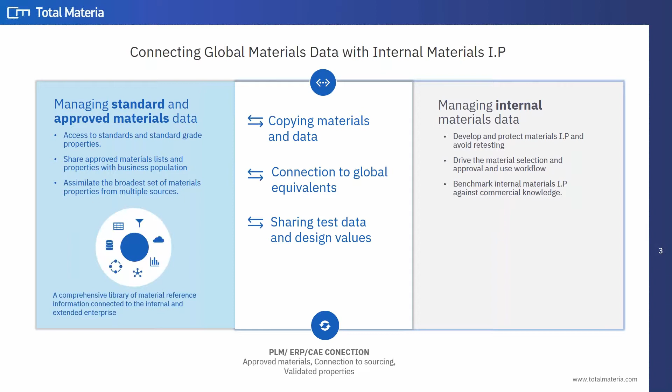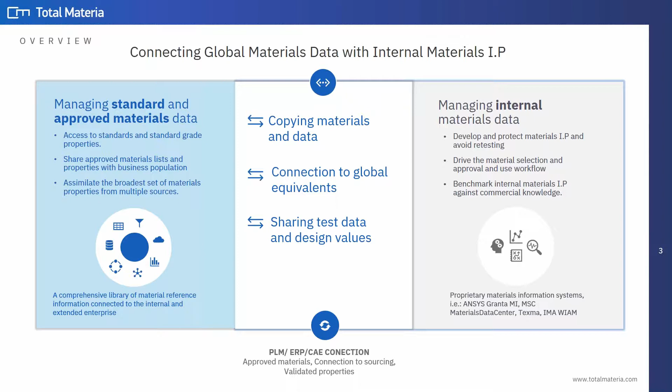So we're talking about a library of materials reference information that can be connected to internal materials data systems, and you'll know some of these names at the bottom here. We have Total Materia providing a data management tool integrator, and you'll also probably know something about Granta, MSC, Texma - this is what we're talking about when we think about materials management systems.

So again, theoretical point, let's take a step back. Why is standard grade material important? Well, the fact is that inside the business, although we may be approving those materials and calling them something else with an internal designation system, they are still connected to standard grade materials - materials from ASTM, from IS in India, GB in China, EN in Europe, DIN in Germany. The scope of standardized grade materials is critically important as a bedrock or foundation for the development of internal approved material lists.

So whether it's about finished products or manufacturing processes, the reference in most industry sectors is connected to the world of standardized materials. And that's really tough to comprehend, especially when we start thinking about global business.

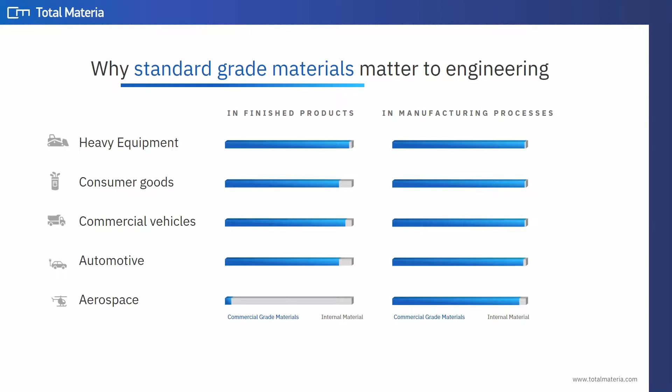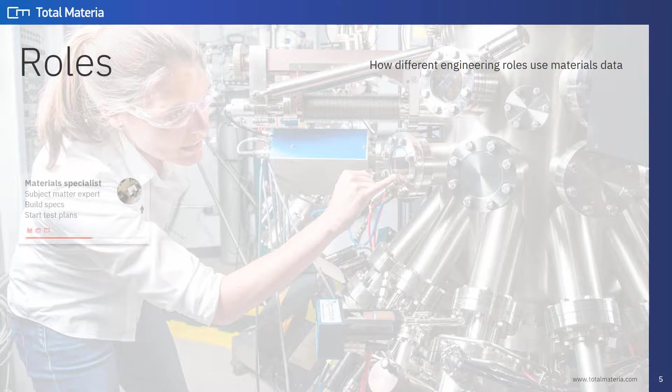Second thing is to think not only about what type of materials and what type of materials information is important, but also what roles use data for, and what's important to those specific roles in the business. There isn't just one group. It's not just simulation, I'm sorry to say.

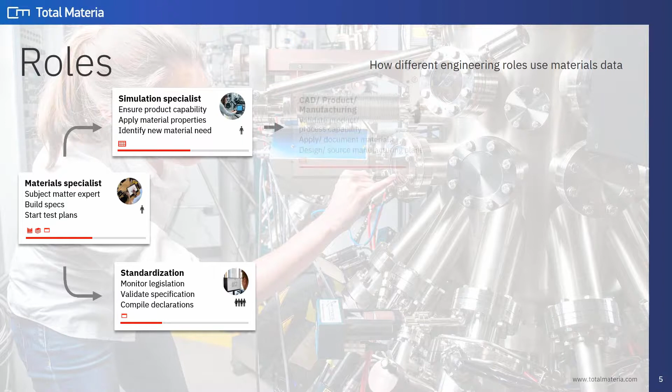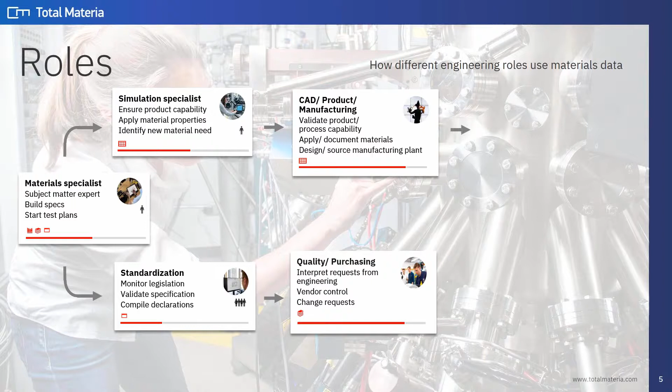I think probably a lot of you are from simulation or CAE. Dare I say, it's not just about you. We also have many other groups in the business which can utilize well-structured data for their jobs, for the roles and tasks they're doing, which means a practical platform for materials information can be used by practically all areas of the business that need data to do their jobs.

Whether it's about the materials specialist who has pretty much big responsibility for controlling specs, starting test plans for new material validation - yes, we have other groups which are monitoring legislation and standardization. Some profiles would be known as product stewards, for example, material stewards, who have a deep understanding of the standardization of information coming into the business.

We also have, of course, what we would consider more focused data users who, for example in the case of simulation and CAD, are looking for very specific materials properties for the most part to carry out their business function. So finding advanced properties, stress strain curves, fatigue data in order to run accurate calculations is a simulation specialist's focus. Now, there are many other things that could be interesting.

For example, how do we compare material behavior? How do we make a material selection, uncover opportunities to find other possible materials that can do the job in a better, safer, stronger, lighter way. But at the end of the day, the requirements in that area are quite specific, and we'll talk about that as we go through.

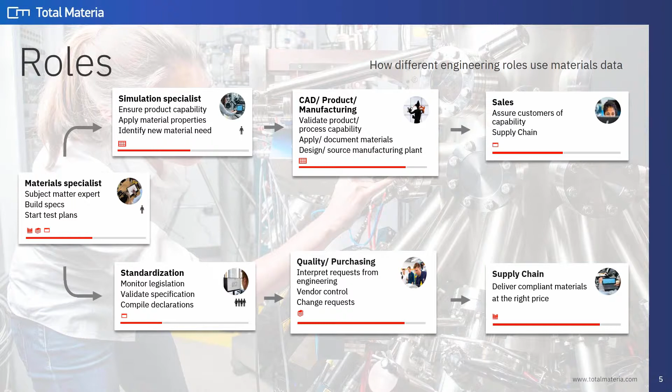The main takeaway from this slide is that different groups in the business have different roles, different jobs, different objectives. But using a comprehensive, joined up set of information to make those decisions means that we still have consistency. We have a single source of information for a business, and with a practical approach, it can be accessible by all of these characters in order to drive the main focus of the business, to have good sales and to have a quality supply chain coming through from the other end. So it's very important that we consider this.

So let's run through a couple of points about what's important for reliable data when we think about external materials databases. I'm talking about Total Materia style or type of reference databases which provide information for the business that is not inside the intellectual property that you hold in the business. The other question is whether that materials information you have is organized in such a way that is exploitable, discoverable by different groups in the business.

So external databases like Total Materia, where people come, need to be complete, because more options means more opportunities in material selection. If you don't have the full picture, how can you make informed decisions about materials?

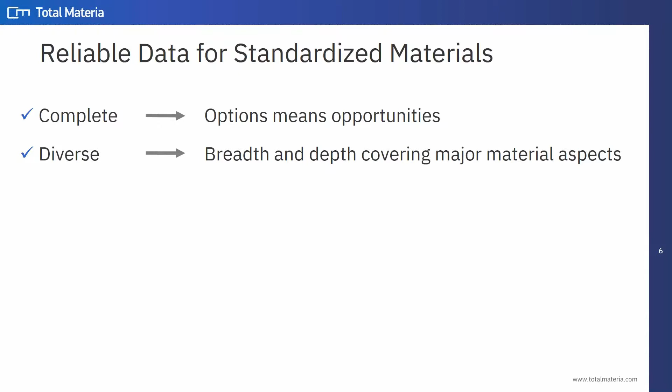The diversity of the data - I already talked about different profiles. If you take a material expert, he's not just thinking about basic durability properties of a material. He's thinking about the application of the material. What happens if we put this into a corrosive environment? What happens if this finished product is left out in the sunlight? What if it's in a situation or application which requires welding? What does that do to the integrity of the product? So diversity in the data is critically important.

Reliability, accuracy, trustworthy for repeatable results. That means that if you have a reliable resource of data, you're able to ensure that decisions made upon that data are accurate, but also to ensure that different groups or levels of experience and knowledge in your business are leveled in a way where decisions about materials and information coming from materials can be made consistent. That means there is a best practice for everybody to go to one place and find the same data and make the same decisions.

Curated. What does curated mean? It means looked after, kept up to date. It means basically how do you have a resource of information which can be put into place, looked after, and that means the continuous prospect of obsolescence, which often comes with sources of information like external databases of data, is avoided. But that takes a huge amount of work.

I'll talk about that when I talk a little bit about the context of Total Materia.

Comparable. That's a simple word, but actually there's a lot of detail and a big importance for the knock-on effect of future applications. A relational structure of material information is critical in the optimization of selection possibilities, because if it's not done in an organized and relational way, how can you compare apples with apples? It needs to be done in a way which is organized and delivered to end users where they can easily compare not just similar materials, but also materials from different groups. How do I compare a stainless steel against an aluminium against a composite material in a lightweighting study? This is really important, and it has to be accessible.

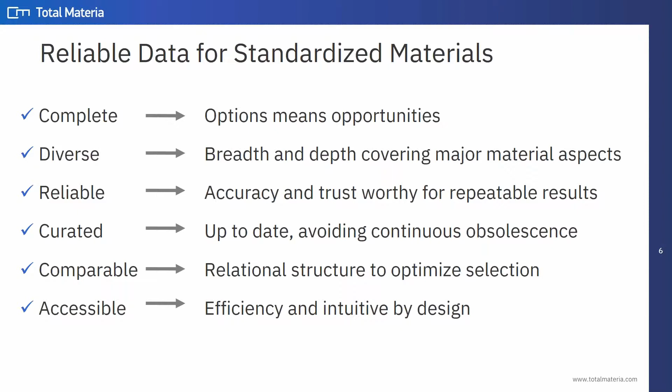So if we're talking about global business, it's not just about efficiency and user experience, but it's also about localization. It's also about being able to make this available to different people in the business.

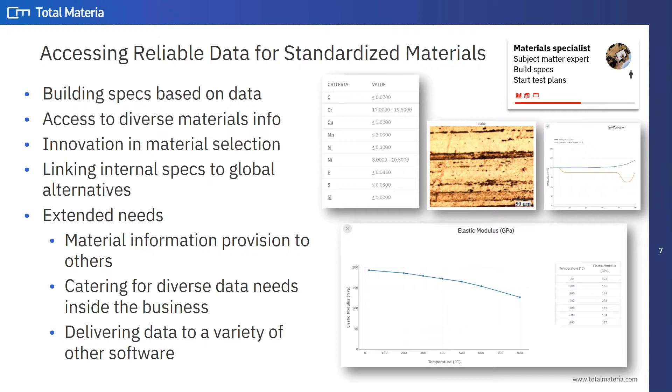So I'm going to be a little bit quicker, but when I talk about material specialists, just to dive in, building specs based on data - I talked about how a material specialist needs to have diversity in the data. That means extended needs of the information, whether it's basic chemical composition, microstructure, different corrosion diagrams, or just basic physical properties. The extended needs need to go through to the business. We see material specialists as providing to internal customers like simulation in a specific way.

Simulation specialists have another specific requirement for data. You have different periods or stages of your analysis work, starting with the initiation phase where you're defining the task and executing the model and calculation.

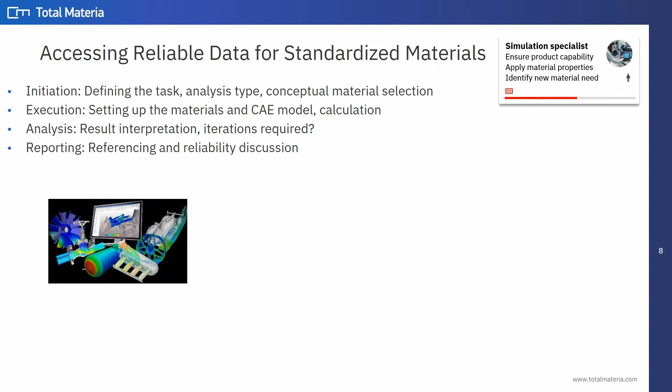This is where the feeling of not having data starts to appear. You become aware that you need accurate data to do your analysis. You do the analysis, interpret the results, and decide whether you need to repeat or iterate the calculation.

And finally, reporting, which means having to justify the reliability of the discussion. So overall, we're looking for a very decent error margin in our simulation. But how does that relate to the world of materials properties? Well, it's all over the place.

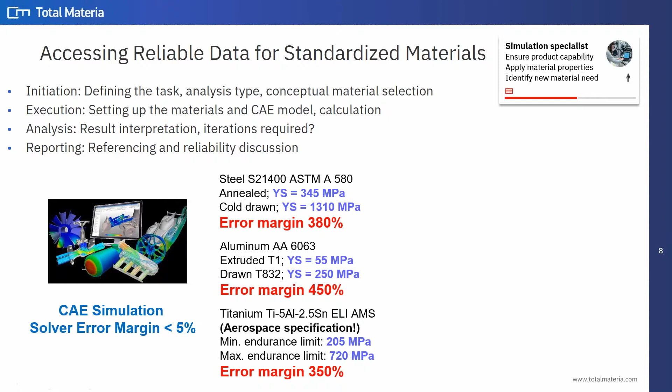Let me be clear with a simple use case. If we take a stainless steel and look at two different delivery conditions, you can see a huge difference in the yield stress data. An annealed material delivers a yield stress of 345 megapascals, while a cold drawn one delivers over 1300 megapascals. That's massive. So if we make the wrong decision in selecting that data, what's that going to do to our simulation error margin?

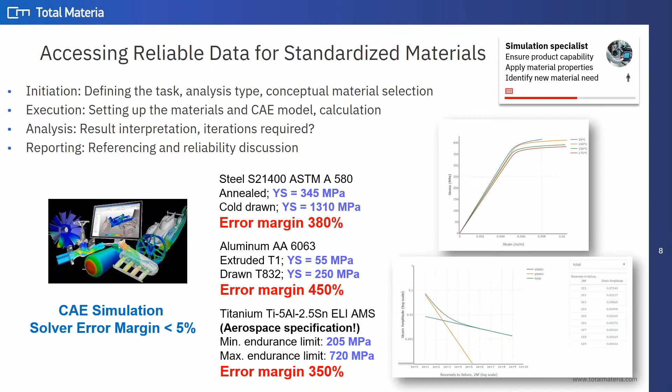We need to take care. That's why accurate delivery of materials information from standardized sources is critically important.

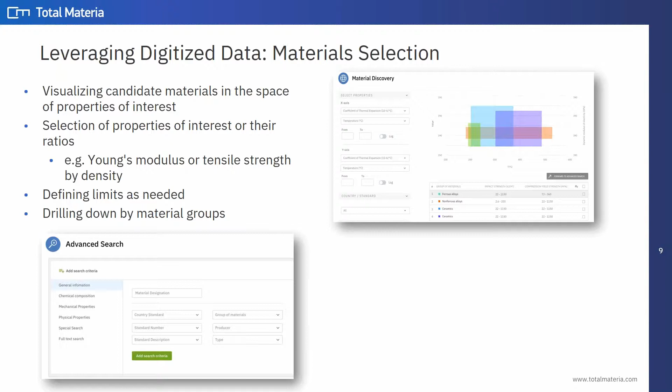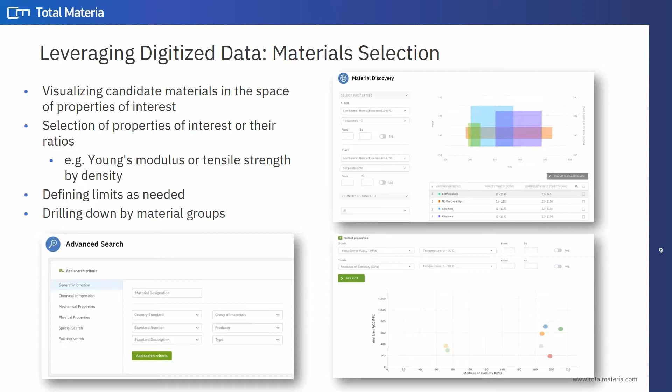It's also about selection. How do we make decisions conceptually about groups of materials? How do we visually make quality decisions based on properties of interest, maybe ratios of properties? For example, for light weighting, we can put strength parameters and ratio them with density, defining limits of durability to understand minimum levels of strength, so we can make quality decisions and compare materials graphically at the material level or the property level.

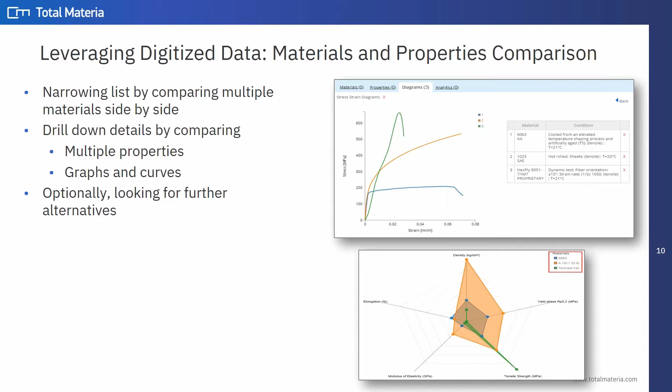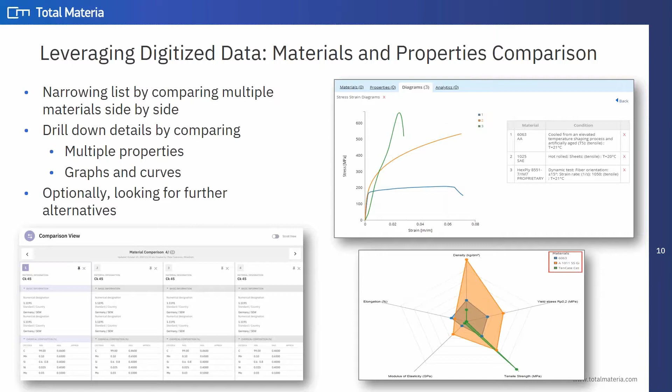So this idea of materials comparison and selection has to be done in the context of a sound relational database, structured to allow that kind of data visualization and comparison.

I have to drop in about how we tackle this problem because it's important. We've been doing what we do for 20 years now, and the Total Materia database offers that comprehensive go-to place for materials information, whether metallic or non-metallic materials. For the design simulation group, we have a huge reference and library of experimental data.

Coming from around 3,000 experimental sources. So we're sourcing that information, which means that your typical way to find data—hunting for the experiment, going to Google, assuming anything is better than nothing—we can help there.

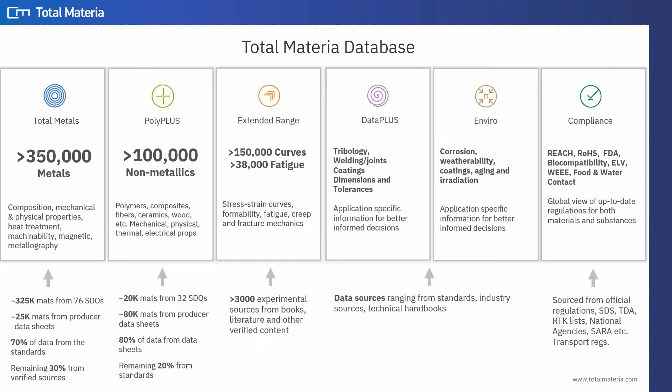And this is really important for today's takeaways. DataPLUS, Enviro—I talked about material specialists having access to a wider scope of information, even covering the global compliance and regulations landscape, which is becoming critically important for materials and substances used in the business. So this all comes together through this comprehensive delivery of materials information.

So that's about external resources, standardized data, and a comprehensive library of information to help make sound decisions based on a huge wealth of information out there.

It's to help you avoid the regular and common ways you currently find information—standards, some books, maybe access to specific websites, some of your own information, but more often than not, Google. To avoid the obvious issues with this approach, it's critical to go somewhere that provides reliable access to a comprehensive resource. That's really what Total Materia, or this external materials information, is doing.

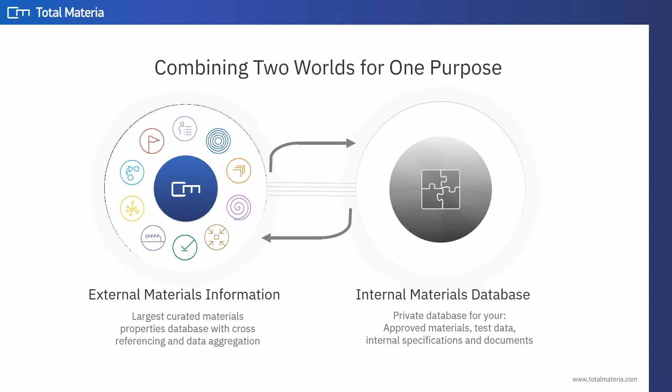But what we're talking about today is how do we combine the internal part with that external part? It's about combining these two worlds. How can that be done in a practical way? Same approach—a few key words about what's important for organizing internal materials management.

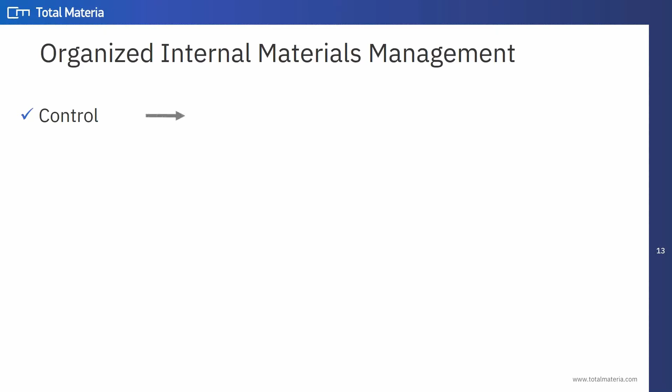It needs to be controlled. Do you have, or need, a validation process for updating materials and adding new materials? It should also be traceable—if we make changes to a material, do we need to keep versions of that material?

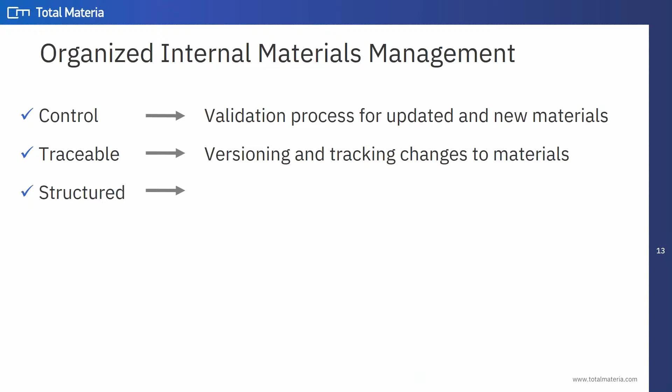Do we need to track the material changes? Who did what and when? Structure, as I said, is critically important. The data structure should also be according to user needs. How do your users search for materials inside the business? This structure dictates that, but flexibility within it is important. Accessible, again, efficient, tailored access for different profiles.

In a business where control is important, we want to make the experience and access to data tailored. That means a simulation specialist might just need to get hold of 2, 3, 4, 5 different properties. We need to guide those users to the right properties that have been validated, checked, and released for the business. And that's in a nutshell what these 4 or 5 points talk about.

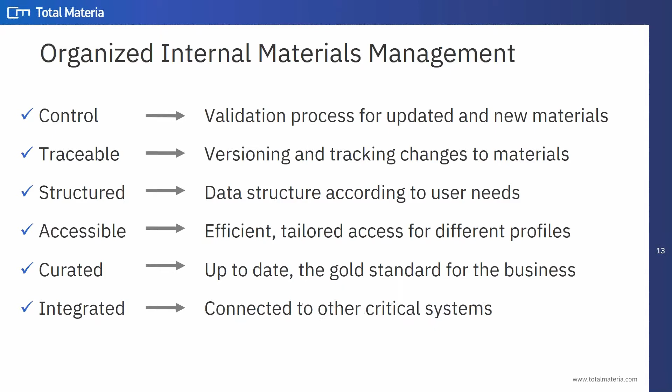It needs to be up to date. The information needs to be up to date, providing the gold standard for the business of information—one truth, as they say. And it should be integrated, connected to other critical engineering systems in the business.

So a few screenshots just to show again how we take on this topic, how we take on this challenge. Being able to create your own material groups in what we call Integrator, but it's effectively a data management module, copying materials from the Total Materia database to the data management solution, which provides the foundation of those standardized grades that I was talking about at the start of the presentation, and being able to create your own maintenance or user-defined properties.

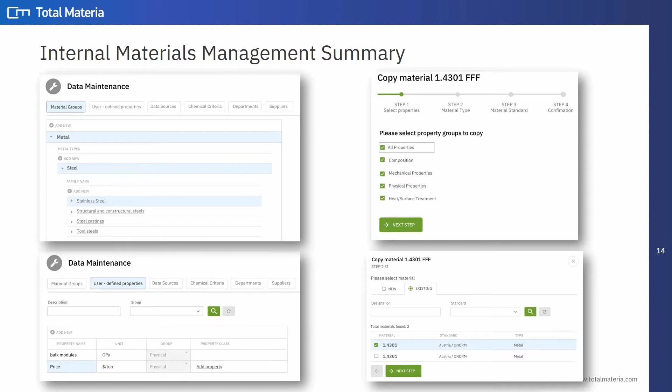And being able to create a connection between internally approved material lists and the outside world, other standardized materials. So we can tell our colleagues in China, this is the equivalent Chinese GB material you must use to get the best possible results. So this is about moving this to the global level.

And now we should talk a little bit about export. I'll be a little bit quicker because we don't have too many minutes left, but I probably will end up running a few minutes over, so I hope you will stay with me.

What are the general objectives for export? So we have our two systems in place: our internal data combined with our external source of data, and now we need to utilize that data throughout the business, providing efficient access to the properties used by different end user groups. That's one key point—a CAE specialist has a different requirement to a CAD user.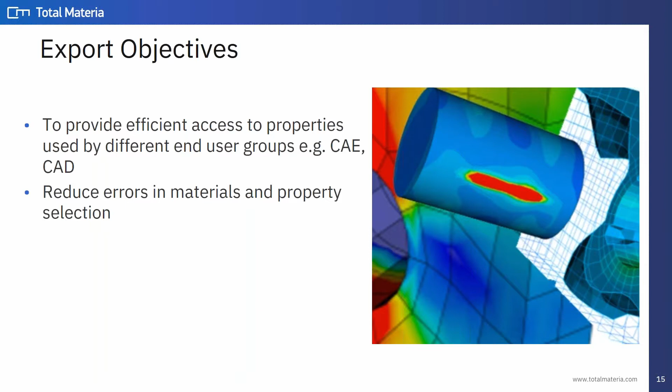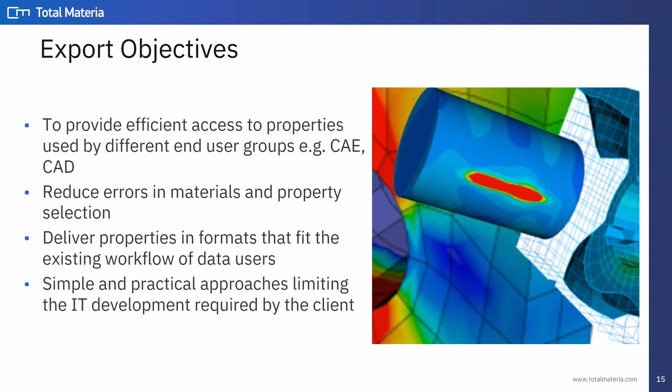Reducing errors in materials and property selection, delivering properties in formats that fit the existing workflow of the data users, and simple but practical approaches in limiting the IT development required by the client. That's important because if we make something too complex, it's not going to work for us as a business. It needs to be done in a way that fits the requirement of the business.

So how do we think about export options? Well, we think flexibly and we think tailored. Property by property is possible—exporting property by property based on the selection of the end user. Creating a one-click approach, which means being able to select all of the properties defined for a specific export format. Bulk exporting, which is typically used to mass-populate other repositories, maybe inside a CAD, CAE, PLM, or ERP system. Bulk exporting data and moving data around is important.

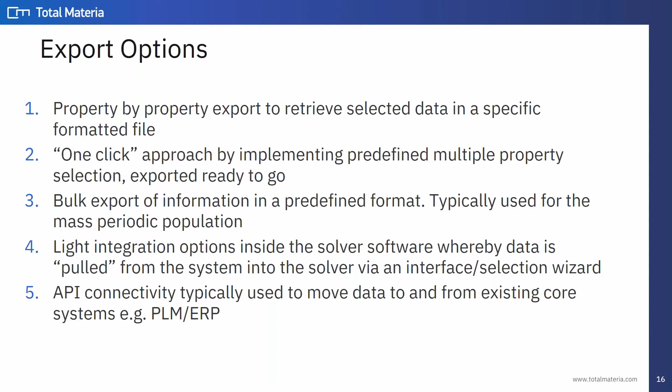Lighter integration options from other software, and also API. API is normally a hot topic when discussing connectivity, but it's not for every company, it's not for every system.

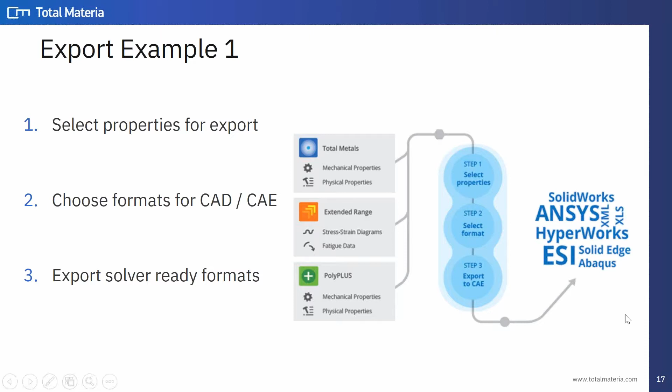This just shows you export example one, which is property by property selection. So for example, from Total Materia, you can select properties and move those properties to a format which can be imported to any one of 23 different solver formats.

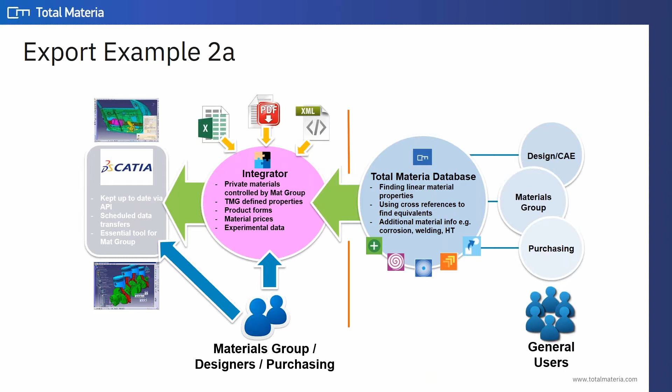Another example, in one of our clients' specific cases, is to be able to create a bulk export from the Integrator module and deliver that to CATIA. In this case, it's not just about the material properties—it's about inserting additional information, like rendering information, which would then also be included in the export folder and exported to the repository on the company side, and then imported into CATIA as a complete import file.

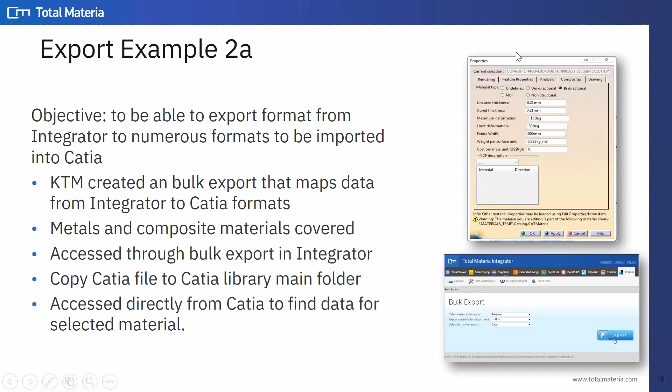And this is effectively what I've just described, but the whole point is to make sure that we have comprehensive coverage of the information required on the material card.

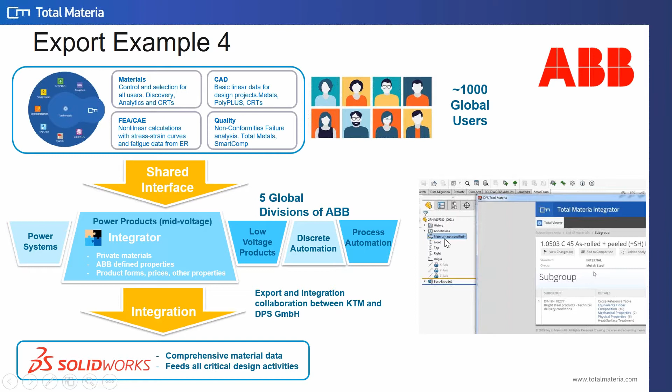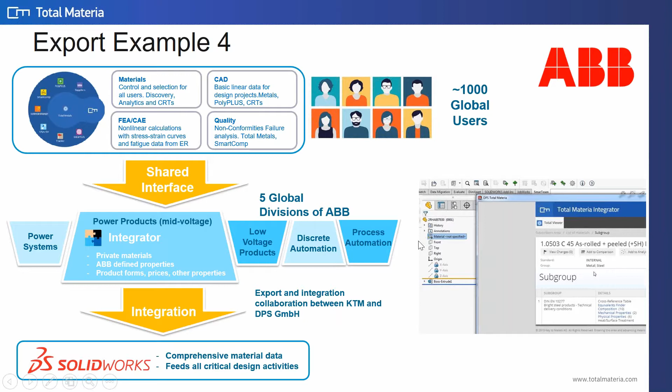Another example might be to have a slightly tighter but light integration, let's say, meaning the ability to call up access to the materials management solution from the software itself. This is an example of SolidWorks, where we can simply click here, open up, make a basic material and properties selection, and bring that information through to the SolidWorks interface. So we're not even leaving the environment to make that decision.

So basically what we're talking about is creating an approved materials list, but pulling the foundation of those materials and those material properties from the external source. So pulling the material properties, advanced properties like stress strain curves, fatigue data, any additional data, and bringing that in to combine with your own test data and diagrams that you have on your side.

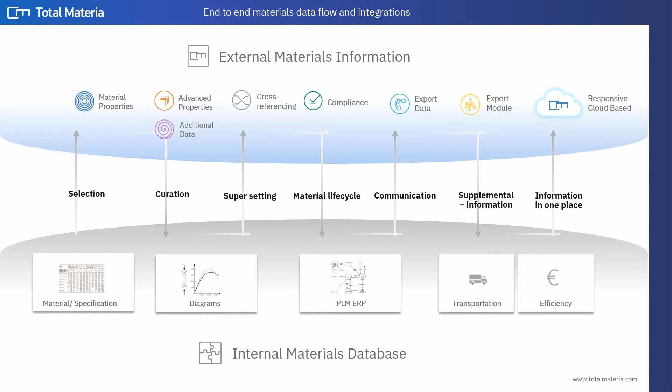How do we then exploit that data and communicate with other systems, PLM systems, ERP, other softwares? Exporting data I've already described and other potential softwares which can provide value. This is combined with other information important to your business, whether it's about material pricing, transport, supply chain information. The key point is everything is in one place and accessible by all of those roles I've described in the first few slides of this presentation.

A few seconds on future trends, because this is one of the things we said we would talk about. Nothing is a given, and it's a difficult topic to tackle without organized, structured materials information in place. And that's really what I've been talking about in the last 20 minutes.

Once you have the structure and the data in a place where it's validated, it's comprehensive, and you're satisfied that this is providing advantages to the business, that structure of information can be used in other ways. And there are different future trends appearing.

Some of you may know the VDA specification, which is being developed, which is about the control of information about materials. It's not just about properties but also other associated information, about digitizing that content in a way to control and exchange information between different systems at the IT level. That's important because as the VDA specification is developed, you understand the different parts of material information need to be included and standardized in a specific way.

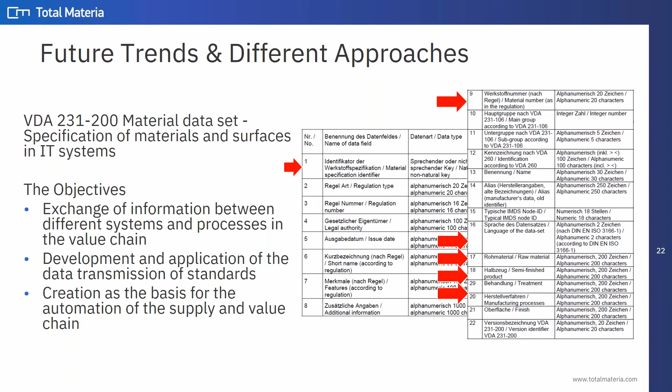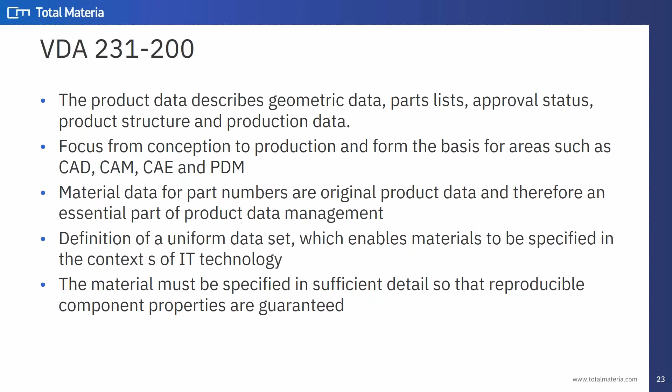So if you have a relational database, it's possible to process this information and make it ready for this kind of technology. This is important for up-and-coming technologies—think about Industry 4.0, Internet of Things. This is where we're going, but nothing is possible without enough data and without that data being structured. VDA is going to really help focus the conception from conception to production and form the basis of areas such as CAD, CAM activities, CAE, and PDM. Really important in that context.

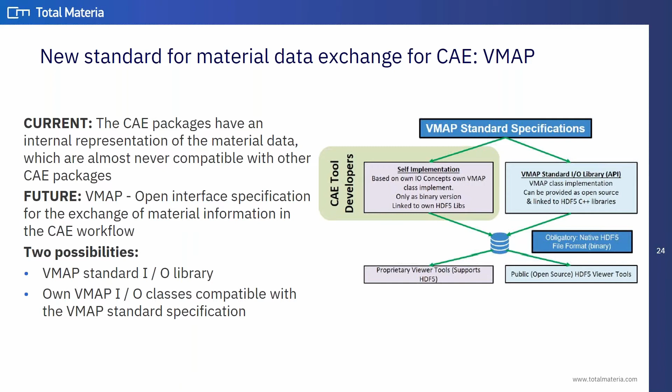A couple of other interesting projects are also trying to standardize the approach, more CAE focused—there are projects running through VMAP, and the main focus of VMAP for the future is to have open interfaces for the exchange of material information in the CAE workflow. At the moment there is no common language between different solvers, which means there's no compatibility. So VMAP is about creating an open source of materials information and information related to the CAE model, which will be able to be applied across all the different softwares and vendors used.

There are different variations of the project, and now we're talking about, with them and Total Materia, Key to Metals being part of this VMAP group, providing the data which will drive the discussion about integrating multi-scale models, sensor data measurement, as well as information about production machines, open ontology for materials and related processes. That's what we're focused on helping that project with, because we can provide that data.

All right, we're nearly there. I thank you all for your patience. Timing is not always the best on my side, but we're not too bad—we're a few minutes late.

So let's think about the axis of the solution. What's important about this? What does this mean, axis of solution? One of the statements we made in writing the material for the Industry Days website was that data management and handling materials information doesn't have to be difficult.

It can be, but it doesn't have to be. And so the way in which we think about this and the approach that we take, it's about being able to utilize a source of comprehensive standardized data such as Total Materia to create the foundation of an approved material list, and then to combine internal materials data with that approved materials list that's been created inside the data management solution.

So if we think about how long this can take, well, there's a few key steps. We have to validate, of course, the systems themselves. Think about the geographical application of this solution in a business. Is the data there at all? Is everything we need there? What about alternative materials? Do we need to check other solutions? That can take a couple of weeks to do some general, let's say, coverage and checking of the system.

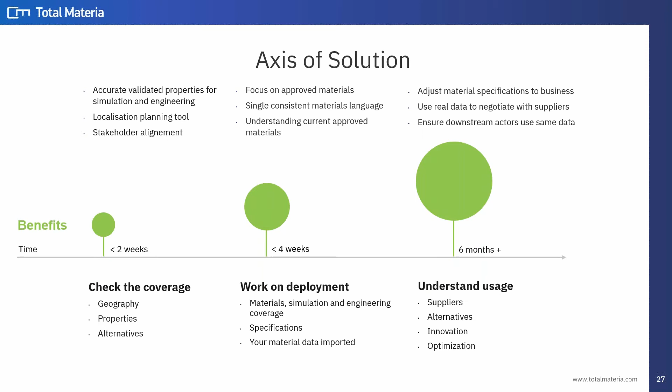So if I summarize what we consider forward-thinking materials management solutions, we have to consider different aspects. The architecture. Like I told you, having a fixed core data model or structure gives a possibility to do many, many different things with the data. Implementing or building a system is as much about implementation of data or inserting of data work, as it is about a nice, let's say, efficient user interface or GUI.

Integration is critical, but to be able to integrate, the structure of the data needs to be accessible again. And the content is all important. The depth and the breadth of the content, providing for all areas of the business which require materials information. And can we make it our own? Customization. Are we able to take what is essentially an off-the-shelf material system and tweak or change it to fit perfectly to our internal workflows and user groups?

And of course, licensing, we can't avoid. Licensing is an important point. Is licensing scalable? Does it provide opportunity to roll out through the business? After all, this is about a business making the most of materials information and taking advantage of that, whether it's through better materials decisions or supporting the general business objectives of innovation. So this is about people being able to use the solution practically and provide value.